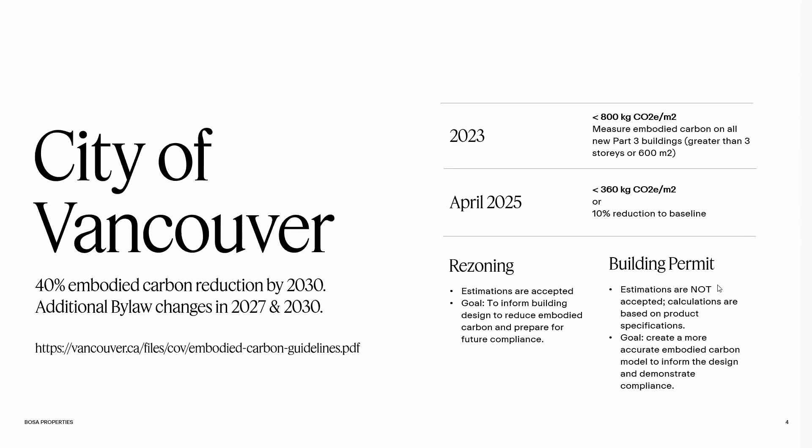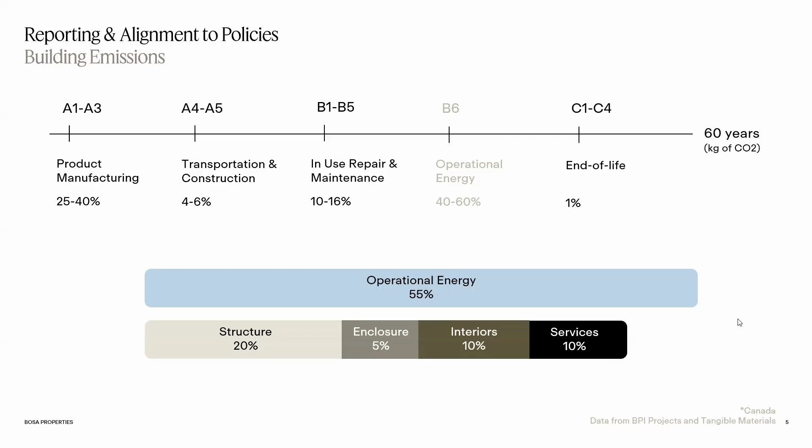What we see right now is that embodied carbon, or any GHG reporting, is often related to government and businesses. There's not a lot happening on the end user side of things. So what we're trying to understand is how can embodied carbon be related to our end user? Is there a way that we make this relevant to end users?

Is there a way that we can make it relevant to the rest of our organization and really tack on this idea of embodied carbon reductions and cost savings to the work that we're doing in other areas of Bosa Properties? Thinking about our marketing teams, our customer teams, how we design our buildings and who we're designing for, how can we relate this?

So what we're doing - sorry, before I get to that point - why are the end users really important and why is this important to look at?

We have about 130,000 to 225,000 new homes that have to be built in Canada every year. So finding this balance between building more homes, but also reducing embodied carbon is something we're going to have to get to, especially as residential construction specifically is the highest emitting subsector across our whole provinces. We have to find a way to build with less impact, but also build with lower cost, plus build more. Finding the balance between all of these different levers is super important.

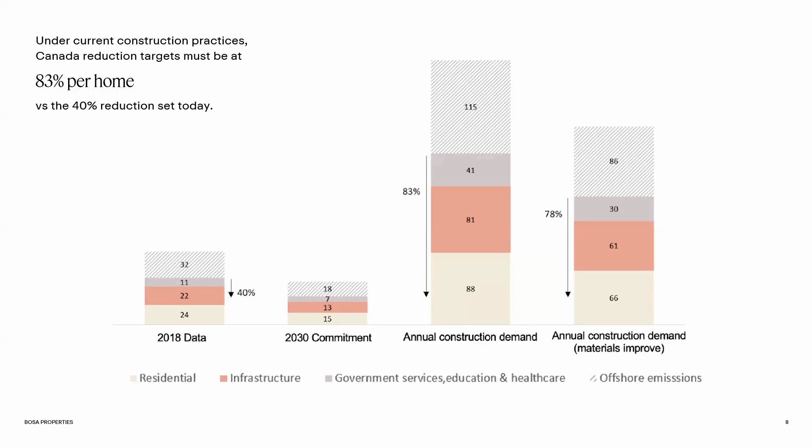So finding this balance of how do we get from the data that we've captured prior, but seeing this annual construction demand, and then actually reducing our emissions by double what we've currently committed to, is where we need to find some synergies.

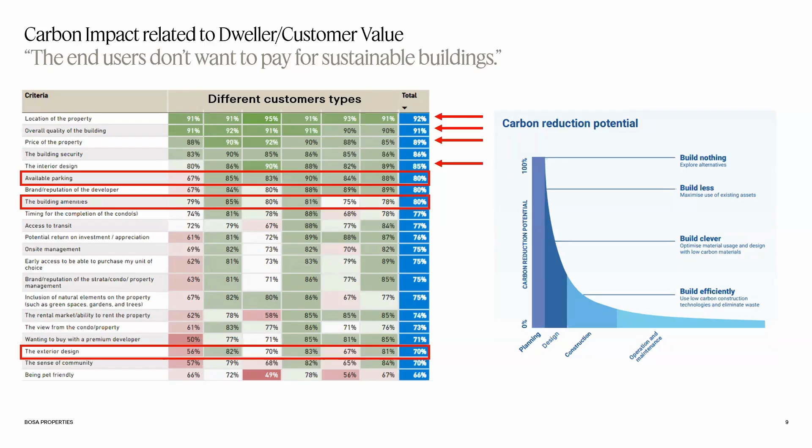So when we look at what our customers are currently interested in paying for, this is some research that we've done around what our customer values in our buildings. The top 5 things often do not have to do with building design or things that can be related to embodied carbon. We're looking at the location of the property, the quality of the building, the price of the property, and building security - those are the top 4 things they really care about, and also the interior design.

But what can be related to both customer value and embodied carbon is, one, parking; two, the amount of amenities; and three, the exterior design of the building. So how can we relate embodied carbon to these customer values, but without taking away from what our customer wants, while making it more efficient?

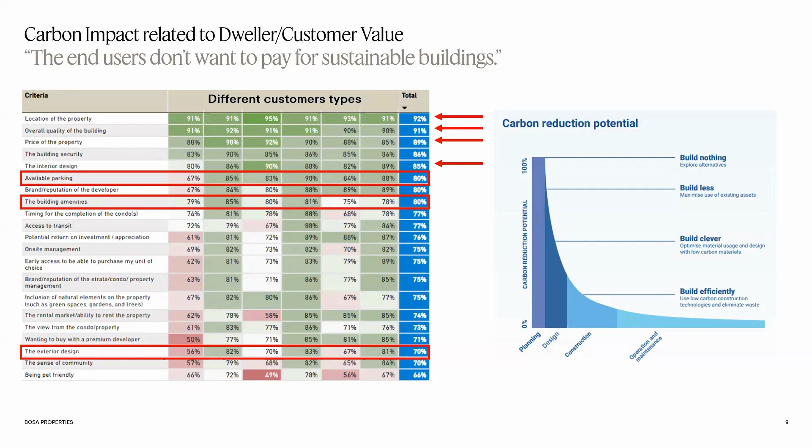So one, we don't have to pay for as much of the materials, and two, we can still see that revenue boost from providing what our customers really value. So what I'm going to do is walk you through the different levers that we took to reduce embodied carbon, but also really reduce our hard costs across a few different projects.

So this was a great example. When we look at our parking, we're trying to get as efficient as possible for our below grade. Below grade embodied carbon is massive across projects.

Many of you probably know this, but when you look at total embodied carbon below grade, if you were to have no parking at all, you'd probably cut your embodied carbon by almost half in high-rise multifamily buildings. So what we did is we said, okay, how can we remove as many parking levels but have the same amount of parking? So we really tried to get efficient with our core.

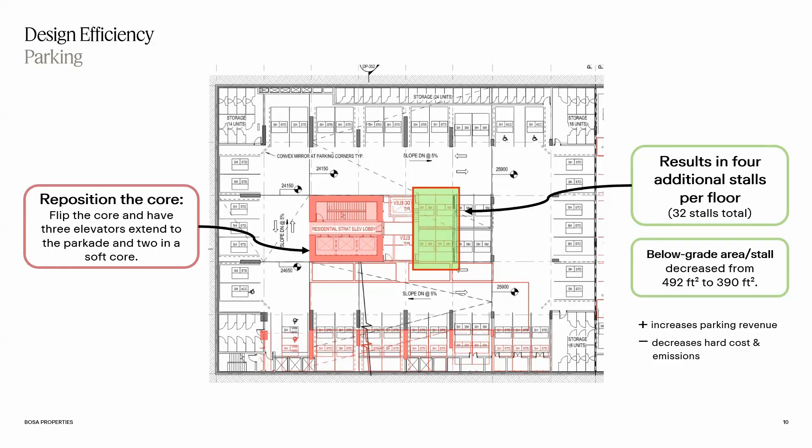We repositioned the core and had 3 of the elevators extend to the parkade, but then only 2 elevators to a soft core. That allowed for more space to be available to realize 4 more additional parking stalls per floor, which resulted in 32 additional stalls.

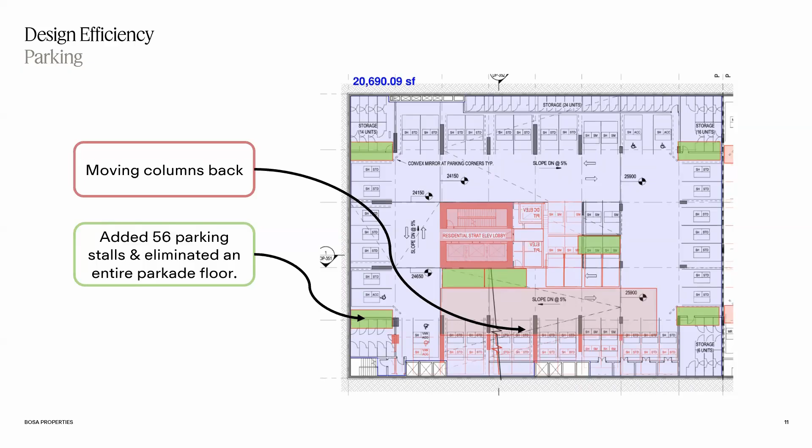What happened then is we also moved our columns back, which allowed for 56 additional stalls of parking total for the whole project, which combined with flipping the core, allowed for an entire parkade floor to be eliminated. The amount of carbon that can be reduced for one parkade floor is incredible. We'll get into the actual metrics later, but eliminating one excavation depth is super impactful.

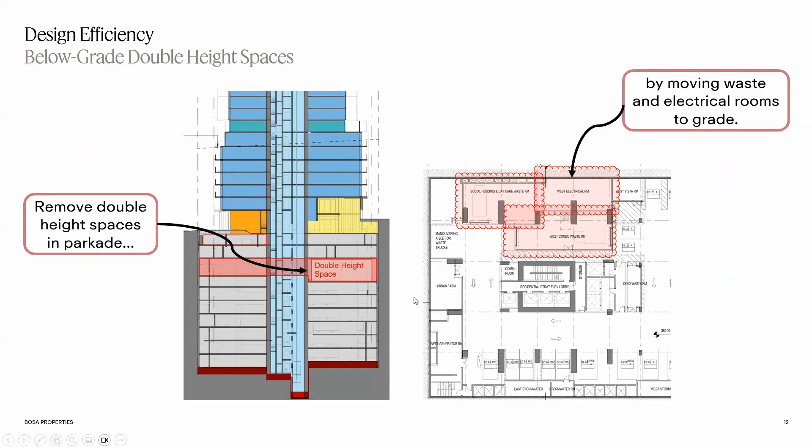Another piece we were looking at is removing any double height spaces in our parkade. We had electrical rooms and waste rooms moved to grade, so this double height space you see here could be eliminated, again reducing excavation depth.

The third thing we're looking at is massing complexity, and a ratio we use is the amount of enclosure for the enclosed space. What you see in this green box, the green outline, is an articulated facade that we made more efficient by just moving it to a square box. This reduces the amount of materials needed to build the outside of your building.

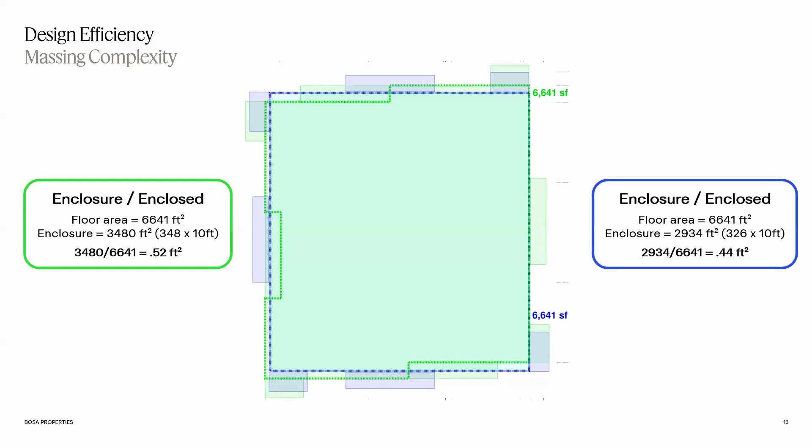Very simple principle, but it really reduces the amount of embodied carbon. So again, simplifying your design also saves on hard costs.

Similar to this last discussion, the amount of balcony space - very straightforward. Are we over-designing our balcony space for our customers? We're not saying get rid of balconies, but how much balcony space is actually needed. For this specifically, when we looked at total outdoor space versus interior space, we had about 18% outdoor space for the floor area, versus when we reduced our balcony space slightly, we got to 15%.

Again, looking at these ratios, trying to understand what aligns with our customer values, how much space do they want, but also what can we see in terms of getting more efficient to reduce our hard costs, and then also reduce embodied carbon.

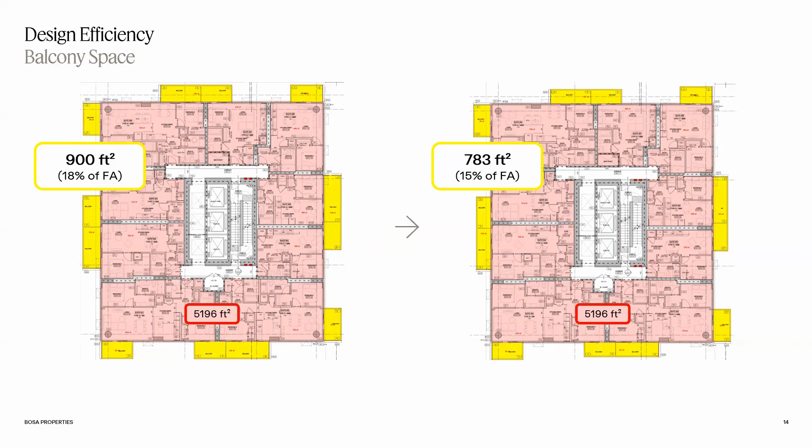That's right. There we go.

Another level we used was our common circulation space for the corridors inside our buildings. Again, super simple, but let's not over-design the inside of our circulation spaces. So meeting code, making sure we're not making hallways larger than they need to be, but also aligning to what our customers value - do they need a larger hallway for XYZ reason?

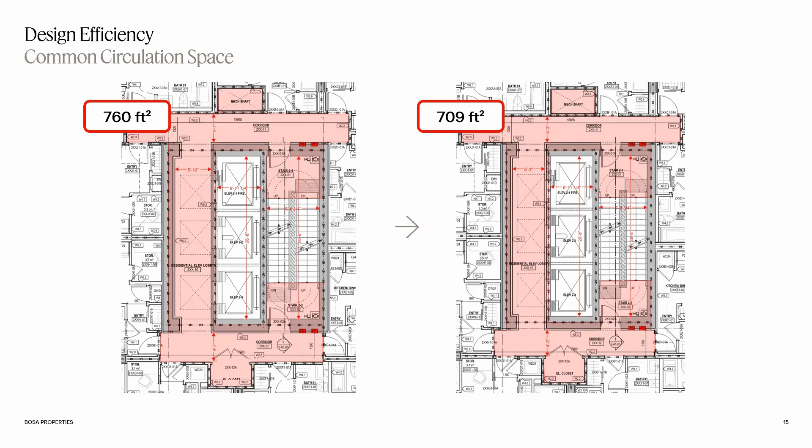Can we design to what is just enough and what is needed or valued by the customer? Again, it reduces materials and allows you to realize more space, more space for your saleable area.

So starting to change this narrative that embodied carbon is not a cost premium when you're trying to get these reductions. There are simple design principles that you can use internally to make sure that you're realizing those cost savings as well. I might leave it there.

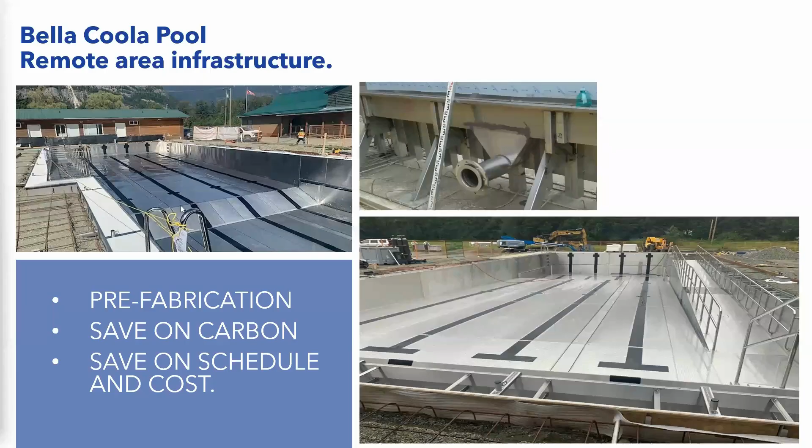Oh sorry, I'll go back a bit. You can see how the stainless steel pool comes together. It's a bit of a different look, but everything comes in pre-welded and pre-sealed, so you actually have a quality control measure that allows you to go fast. I'll just move on.

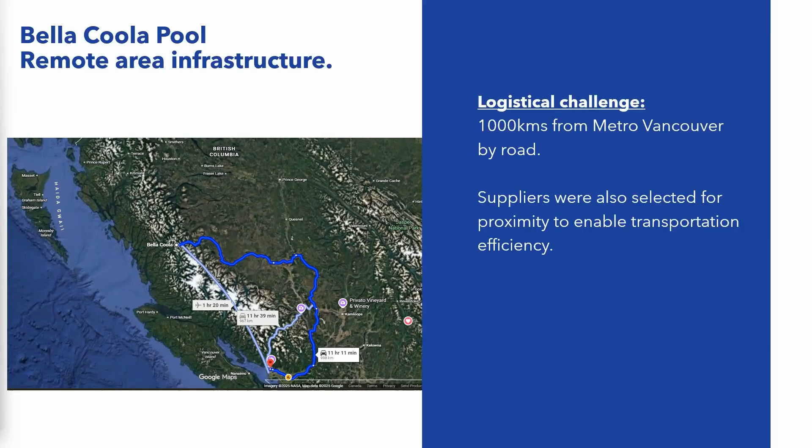So Bella Coola is by road about 1,000 kilometers away from Vancouver. For us to mobilize, we had to plan early and coordinate well in advance. A lot of pre-construction time is critical, with detailed review and coordination with our subtrades, consultants, and supply chain partners. All of this happened right before we started to mobilize, and we also selected people so we could have efficient logistics to get to the site.

So being flat packed, you can see the picture there, it could all be shipped in. It took 3 sea cans to put all the material together that was shipped out of Europe. This is a German fabricated pool, with German 316 stainless steel, flat packed in these systems, and we just flew out some specialty welders to come in on site and actually assemble it.

We typically would see a 6-month construction period on a pool for their environment, for all the concrete and everything like that. But this allowed us 2 months of savings on that schedule, which was pretty incredible because of its remote area location and the ability to get materials on that site.

Because we saved the 2 months, we were able to avoid our heat and hoarding condition for the concrete pour through the winter, which saves an estimated 20,000 litres of diesel, which we would have had to transport as well. Just in the diesel alone, we would have saved about 53 metric tonnes of carbon emissions. In addition, we were able to shorten our exposure on site, limit our environmental potential for spills or any kind of mishaps. So overall, less time, more savings, more safety, more wins for all of us.

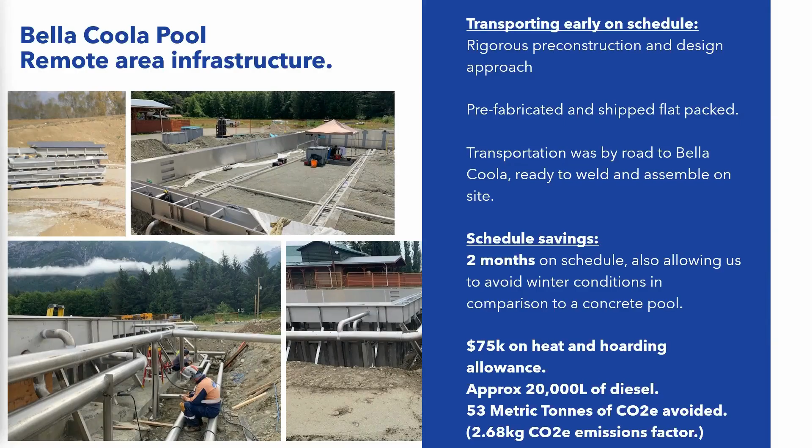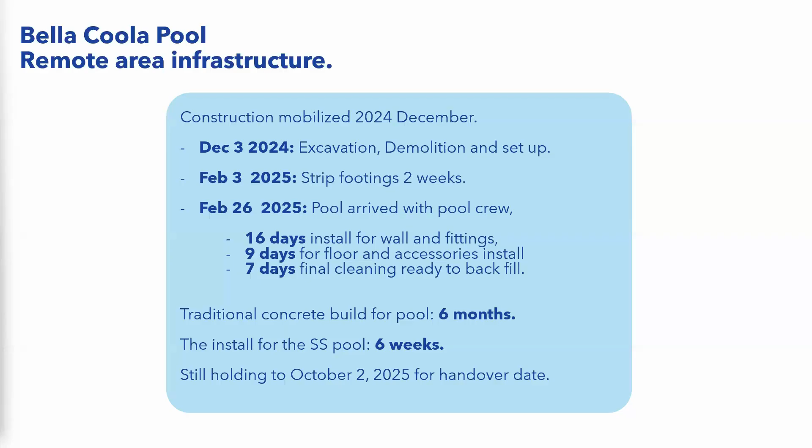So when we look at this, the embodied carbon reductions - I did an LCA takeoff on the stainless steel pool versus what would have been a traditional concrete pool build. We saved about 68% reduction on embodied carbon in materials alone. And that is primarily due to material efficiency of concrete. We still need concrete, but we didn't have to use as much of it.

I also tracked the 10,000 kilometers of shipping and on the road as well with the LCA, on one-click LCA. And these results were super surprising to us.

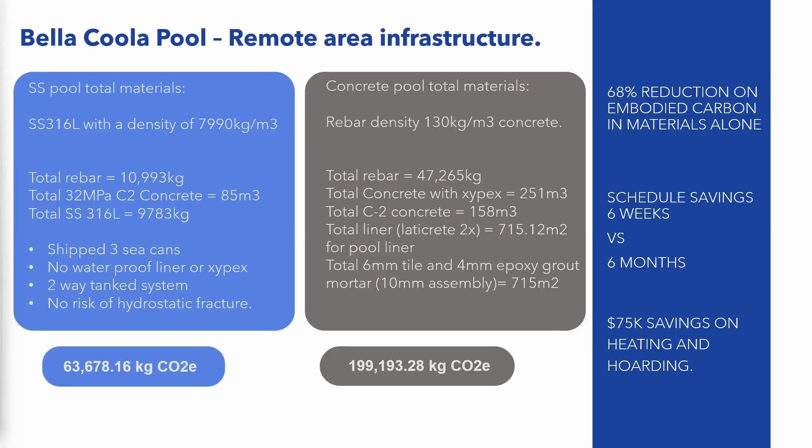So overall on this project, the wins were superb. We could build in a remote area. We could have embodied carbon savings on the materials, just in material efficiency. We can also look at a schedule savings, 6 weeks for the pool itself versus 6 months. And we had put in an allowance of 75,000 on heating and hoarding allowance for fuels, and we saved all of that as well, which is incredible.

So the next project we're going to present is the UVic, National Centre for Indigenous Laws. It was a really interesting project. It was already designed to be mass timber and super low carbon. However, they took a look at the site materials and thought we could actually see if we can go one step further. So this is the site.

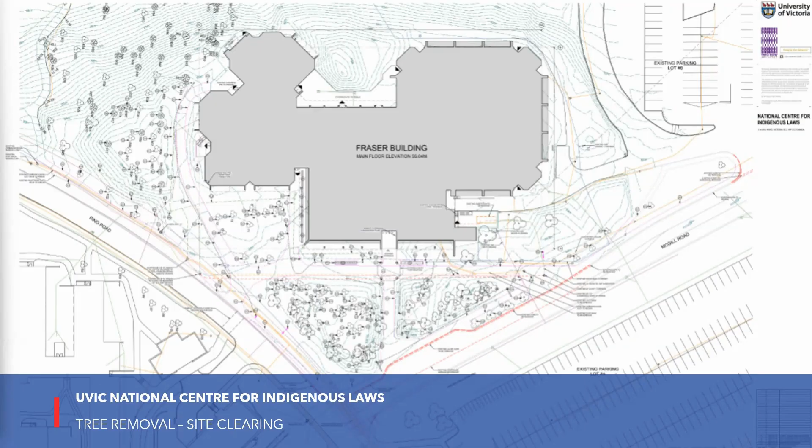You can see it's quite forested around the Fraser building. On the south and the southeast, we're actually looking at doing the addition, where you can see how it tucks in. So a lot of the existing forestry was going to be removed. There was a total of about 79 mature trees on site, and 43 had to be removed predominantly due to either construction or its health and structural condition.

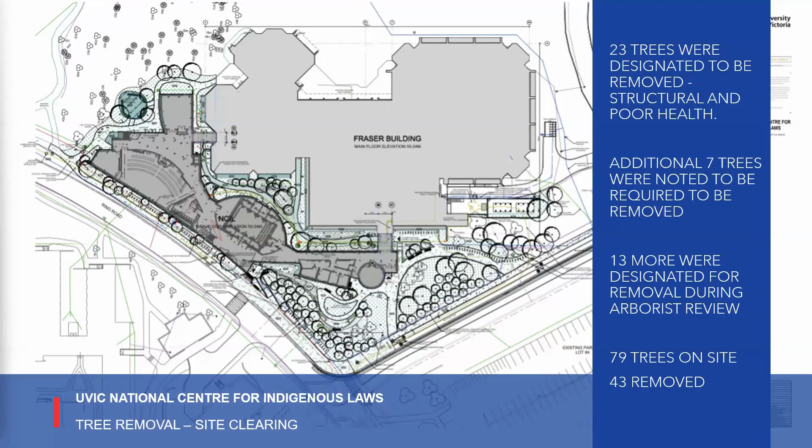So a lot of this encapsulated carbon survives in these trees, and the team looked at how do we turn this into an opportunity. So for a cost neutral outcome, they were able to - just taking a look at how the site looked before demolition and what we're currently developing there. It's about to be handed over soon too.

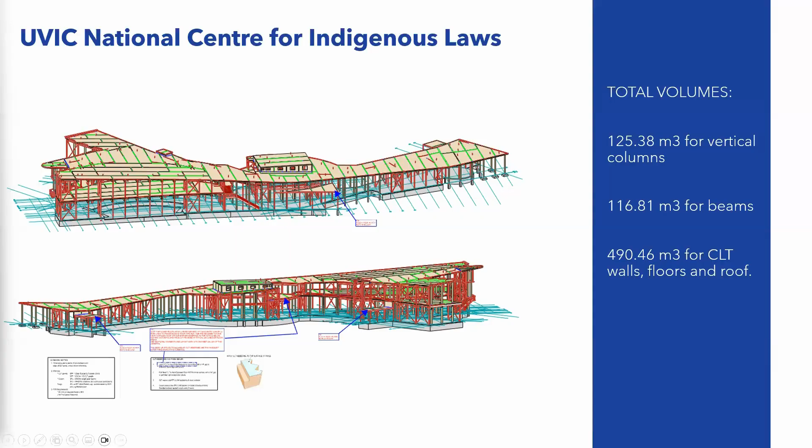We looked at the amount of materials that was going to be included in the design. And to just do some volume takeoffs, we were looking at about 125 cubic meters of lumber for the vertical columns. By using a different approach, by using solid logs, we were able to get a really nice traditional approach for the vernacular of material and also for its look. But it's also a lot lower embodied carbon in terms of how much process it needs to turn it into a structural material.

So 34 logs were salvaged from the site demolition of the trees, and that equates to about 24 cubic meters. So we had to sort them out to make sure that they were structurally adequate and the scale and the size would still fit to the design itself as well.

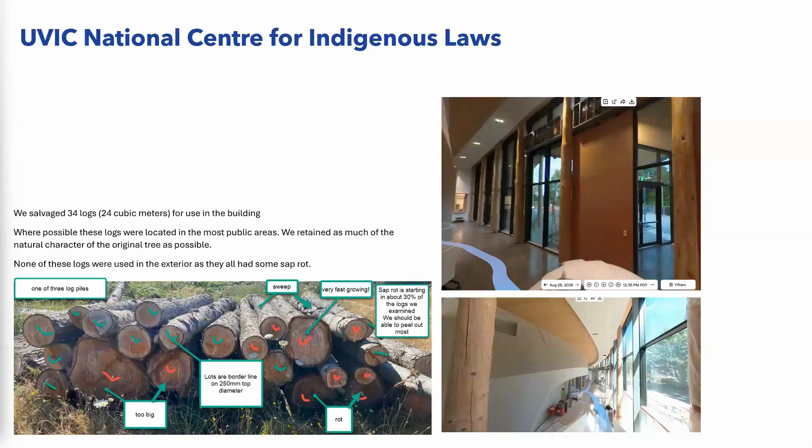And you can see some of our open space AI shots. You can see how these logs were just integrated so naturally into the building, and it really enhanced its architecture as well. The outcome for us was 20% of the material volume was salvaged from the site on the columns itself. So 34 out of 116 designed logs were actually harvested from the site.

By utilizing logs, we noted about 50% less embodied carbon weighting to the whole LCA. So you can see here, just if we were looking at glulam produced in British Columbia versus just a dried conifer, it's about double. So for us to utilize also free material that we would have had to take off the site, there are an abundance of savings, and I'm still in the middle of working through how we calculate that and how we demonstrate that on an LCA.

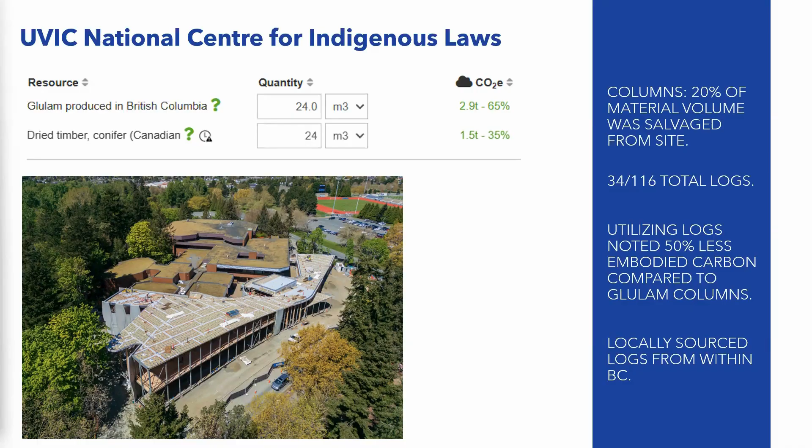But the remainder balance of the logs were also sourced locally from BC. So they continued that articulation instead of having to use glulams, and they used the mass fabricated timber on things like CLT instead. So we could really balance a little bit more of the embodied carbon.

Last but not least, this is actually a curveball from Alberta, sunny Alberta. This was a really interesting project for us because we looked at cost savings and tried to speed up the schedule. What came out of this was a significant win.

This was actually previously with a different GC, and they came to us because they couldn't deliver within that time frame. We looked at how to optimize our schedule to deliver on time.

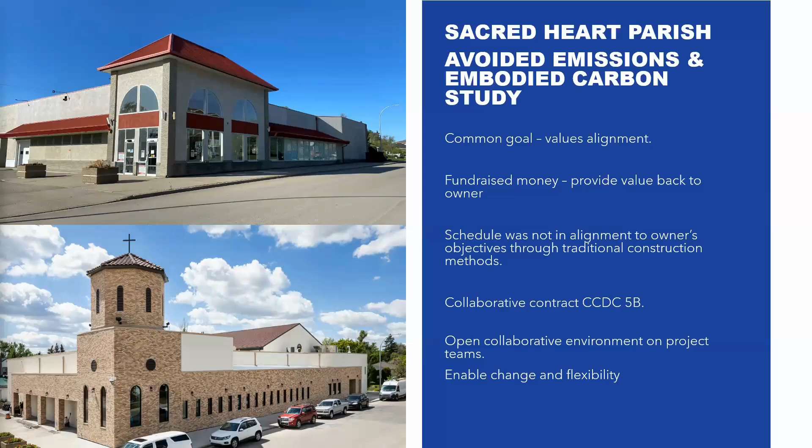It was a collaborative contract, a CCDC 5B, which enabled us to look at the design before we started on site. This was critical because we had really great design partners and sub-trades that we could put our heads together with to look for wins. Having an open environment of discourse allowed us to find innovation together and actually enact on it without any crazy battles. It was just, hey, this is our goal. We had a values alignment and understood the mission.

So you could see here the original rendering and the final outcome. We didn't lose anything in terms of quality, but we did save $256,000 on this build, which went back to the parishioners for their programs. This is back to their good work that they're doing for their community.

In addition, we saved a total of 146 metric tons of emissions through things like avoided emissions on schedule, avoided emissions on heating and hoarding, and material efficiency. 73% alone of that savings was from material efficiency. We also managed to find 2-month direct schedule savings, so more GC savings in addition to that.

So how we did it was looking at the deep foundations. This was an existing building with a very constrained site. You can see what it looked like when we started doing business as usual. We had to pause and say, look, we can't continue this because it's not a safe site to operate on. It's actually going to slow us down, and we're finding all these other unforeseen issues.

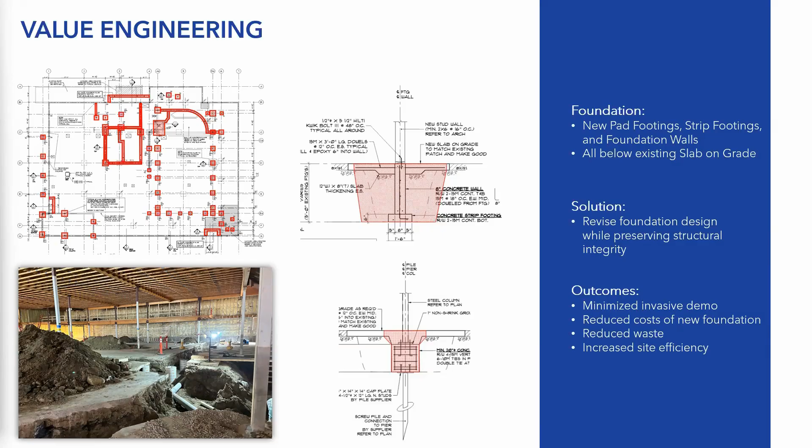So we took a look with the design team and the sub-trades and said, what can we do differently here? How do we make the site safer? How can we optimize? By going to screw piles and alternative shallow foundations, we were able to find a huge amount of savings and consolidate our schedule too. We could do concurrent work, and I'll show you how.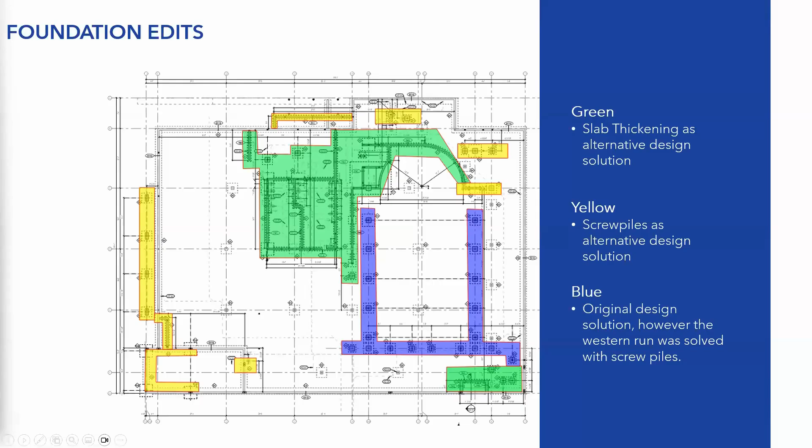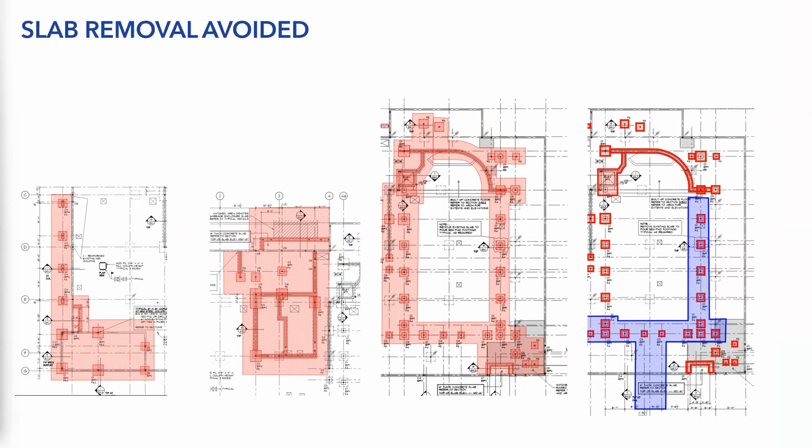This changed how the site turned out and how much material we had to remove and replace. We take a look at the coverage of how much slab we would have had to cut out to excavate safely and how much we would have had to replace. The blue there was just how much we ended up actually taking out to do the undergrounds.

What turned out from the original image with the deep foundations to what we had to implement—just excavating on point loads for the shallow screw piles—we were able to have a much safer site, a much more open site, and we saved on a ton of materials. We didn't have to excavate or cut out as much, and we saved on a lot of equipment time. Because it was safer, we could speed up the overhead work in addition to installing all the other components that needed to happen.

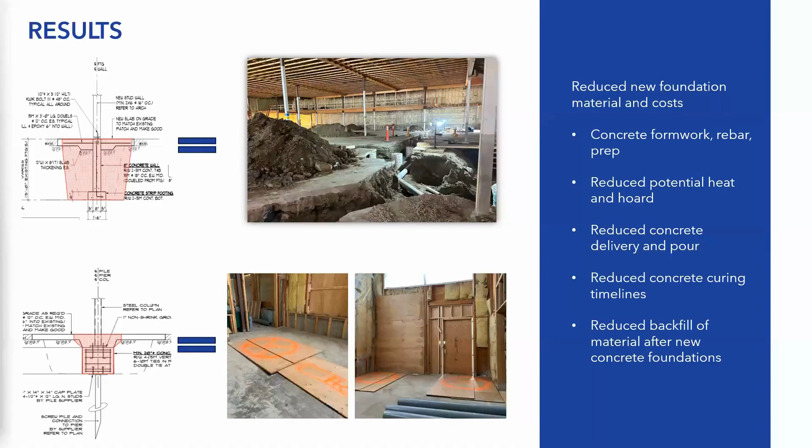So we were able to push that schedule by 2 months. And from that acceleration and our material reductions, we did a bit of a takeoff and calculation. We saved...

107.5 metric tons of embodied carbon just in the concrete and rebar alone. We did have to add the steel core piling for the screw piles, but everything else is tallied up—we ran it through One Click LCA and we were so surprised by the results. This comes down to material efficiency and really optimizing your design on foundations.

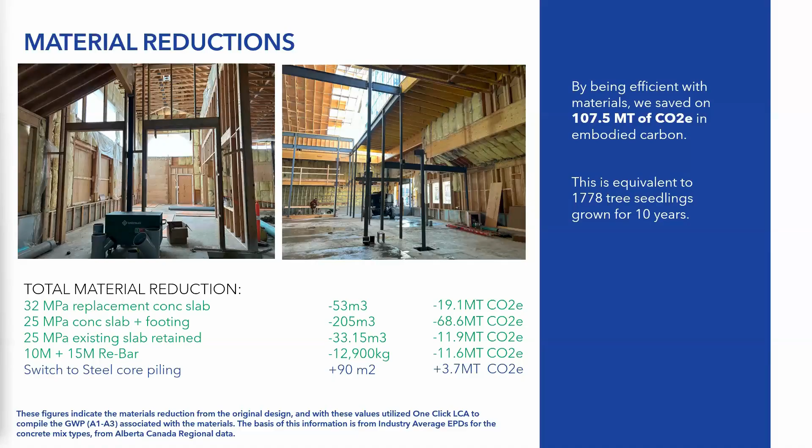I put a little equivalency there—I'm sure you're all pretty clued into how much a metric ton of carbon saved is. For our activity savings, it's hard to measure avoided emissions when you haven't executed on something you can measure. But what we did was look at what we could measure.

We know that hauling concrete away is about 10,000 kilos per haul, and we also measured the location of the recycling receiving facilities. We did that calculation using the Green Freight Handbook, which is a really great tool if you're looking at that strategy of calculating distance in short ton miles.

So we did all the conversions and measured it, and we were able to find 12 metric tons of savings just in that movement alone, from hauling the waste off the site.

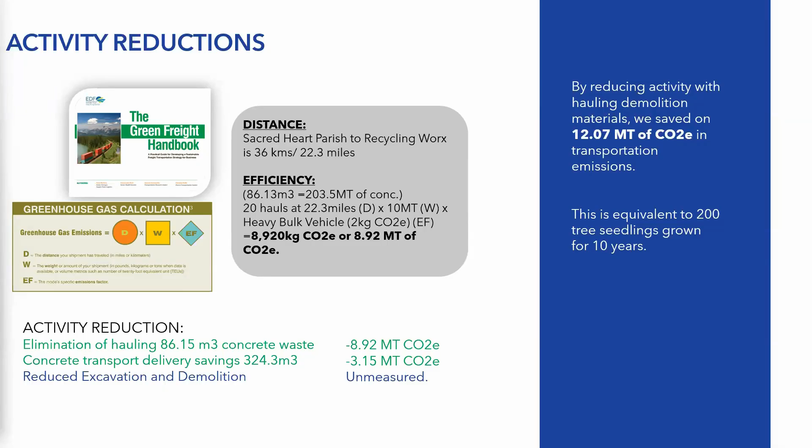Adding on to that, we're slowly looking at how to do these things so we can get metrics, so we can plan our own emissions reduction strategy on our operations.

And then for the schedule reductions—I mentioned this earlier—because we were able to fast track the overhead work, we could rebuild the roofing that needed to be redone at the same time, and we avoided a ton of heating and hoarding conditions, about 5 weeks.

So I did a quick takeoff, and I was conservative here. I only looked at savings on one 400,000 BTU heater, which was actually running on propane.

So when we looked at how many hours this would have run, its efficiency rating on our standard heaters, we were able to save 26.64 metric tons of emissions, which is super exciting because we can use this unit of measure and deploy it across all our winter heating and hoarding plans, and really challenge the team.

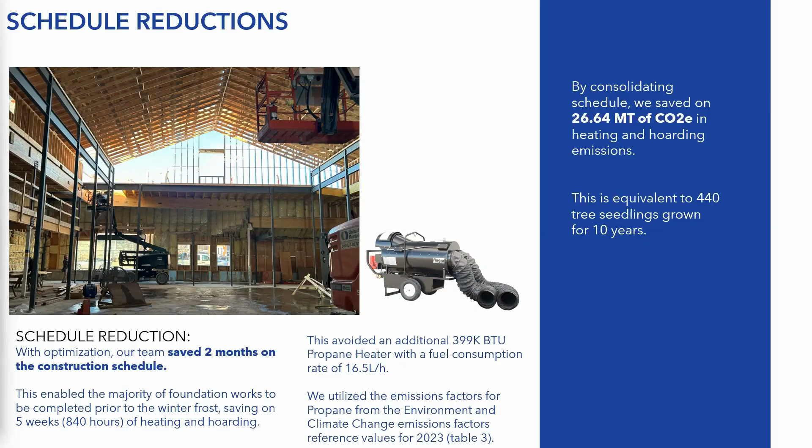Can we accelerate the schedule? Because this is how much money you'll save, this is how much carbon you'll save. And for us, this is going to be how we navigate our future reductions as well.

I think I've blitzed through that pretty fast, but in summary, there are some key takeaways for us. Being creative, really finding different solutions, and challenging all team members to work collaboratively—this demonstrates savings for us on carbon emissions and on costs. We always look for that, because the myth is that sustainability costs more.

And I'd like to challenge that notion. I'd like to challenge everyone today to try and find these opportunities to prove that wrong—prove that sustainability actually saves you money.

I also think having more time up front to really dissect, rework, and understand what's just us doing business as usual, versus can we do something better—investing a little more upfront can save a ton more money, schedule, and costs at the end, as well as embodied carbon. These are all things tied together.

We need to look at the value in our existing materials and existing assets, and look at how we see that differently, instead of saying it's cheaper to demolish or cheaper to throw away. We need to say, one day these are going to be worth so much more—why don't we try to integrate that now?

And we want to use LCA tools to start asking those questions, or introduce a different metric of thinking. So for us, being able to do this, we can now be proactive in the future about how we strategize our construction. One thing I think Zeke and ZebX are doing really well is sharing our lessons learned with the industry, because if we have more adoption of these strategies, it becomes our new business as usual. I think this is the way of the future—we have to work more optimized.

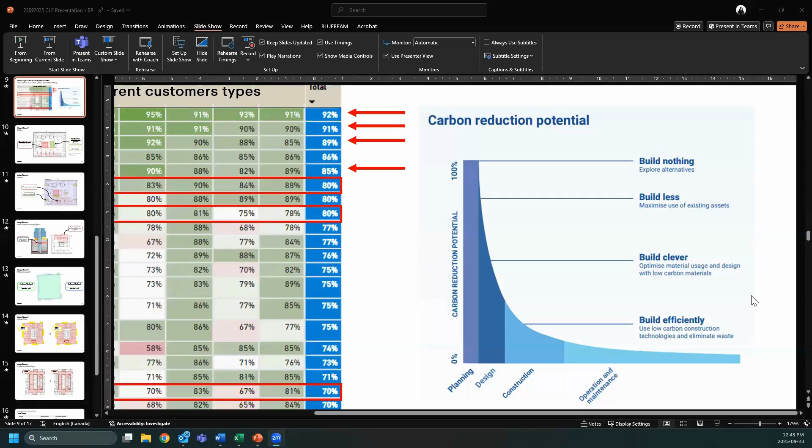And we want to be able to track these savings. So when we go to the City of Vancouver for permitting, we can say, hey, these are the steps that we've taken. This is what we're trying to communicate and what we're trying to get to. And again, you can do your own analysis internally around what that hard cost savings is. That's an even better lever to use with your internal teams to say, let's pause for a second and think about this design. There's an actual huge cost savings if we just go back at this one more time to do an evaluation.

I think there was a question in the chat, and I'm sorry I'm taking a lot of time on this, but there was a question around... pull it back up, sorry. There was a question on...

I'll find it and address it later, but it all really ties back to how we can keep communicating to our teams why this is important, and really tying it back to that hard cost just has not been possible until LCA modeling can be done quickly. I think we're getting there. It's now just sharing these case studies and examples with the rest of the industry, so we know that's the direction we all need to be going.

Totally agree, Ayden. I think exactly on point. We just need to start thinking differently. We need to start being able to put a different metric and a different lens as we evaluate our decision processes and how we progress and how we actually even design together.

I think having everyone at the table is going to be fantastic. Everyone has such different backgrounds and such different lenses. I think this is really incredible for us to start looking at all encompassing, stretching that line that we draw around projects and what we measure. I think this is going to be so necessary for us to actually have that impact and maybe start to challenge our existing structures, our existing contract obligations, and maybe even eliminate some of those nasty lump sums. Are they truly effective? We have to start asking ourselves, are lump sums truly effective for us to get these wins?